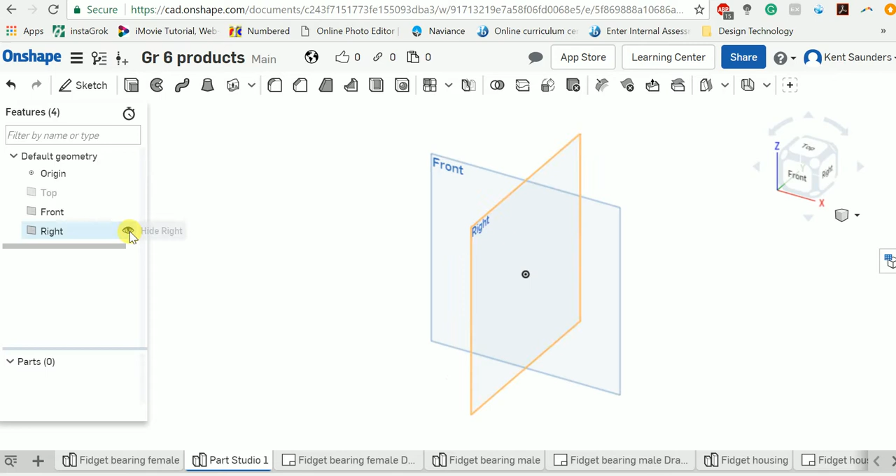So you've got a new Part Studio open. We will get rid of the top and the right plane. We don't need to see those if you saw what I just did, or you already watched the first tutorial. Now on this front plane, we're going to select that again, and we're going to say Sketch, right click, View Normal onto Plane.

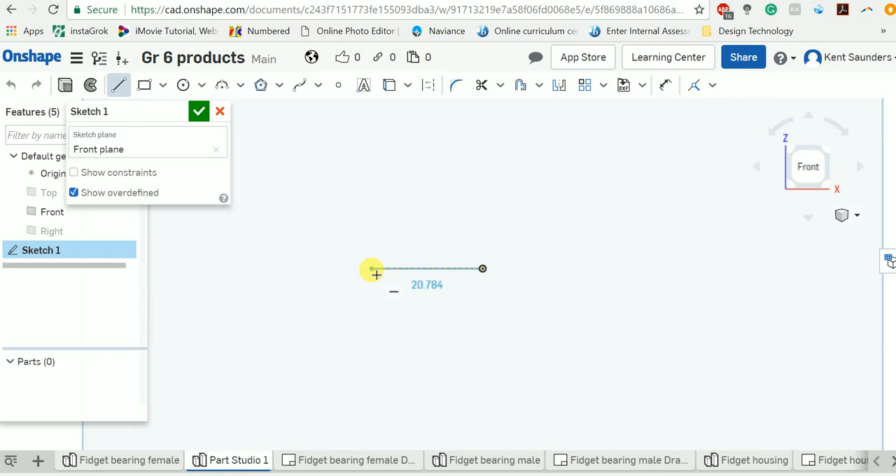Zoom in, because once again this is a small part, and from our center point datum we are going to sketch one line horizontally, and that one is going to be 12. Yep, 12. So like I said, it's rather small.

I'll zoom in again from this line, making sure we're vertical, not at any angle. We are definitely at right angles. We can click and we will make that one 3 mil off in a horizontal plane, and that one is going to be 6

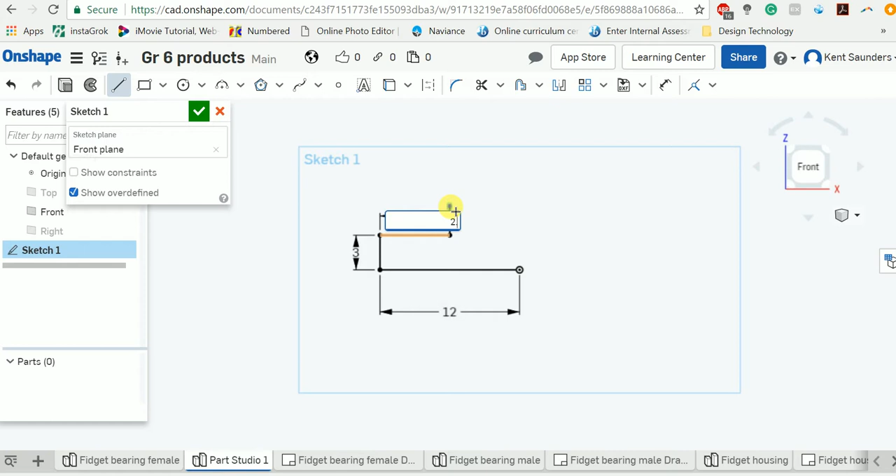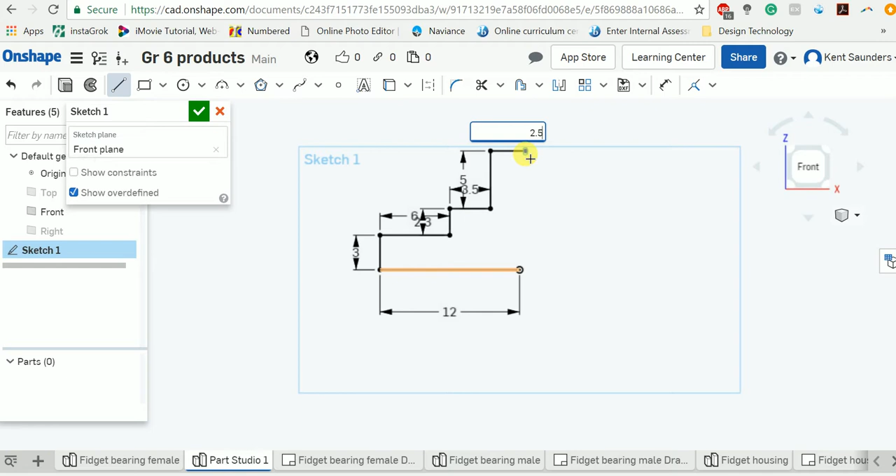vertically. That is going to be 2.3 horizontally at 3.5, vertically at 5, horizontally at 2.5, enter. Now that should be at right angles and join back up with our datum point that we started on,

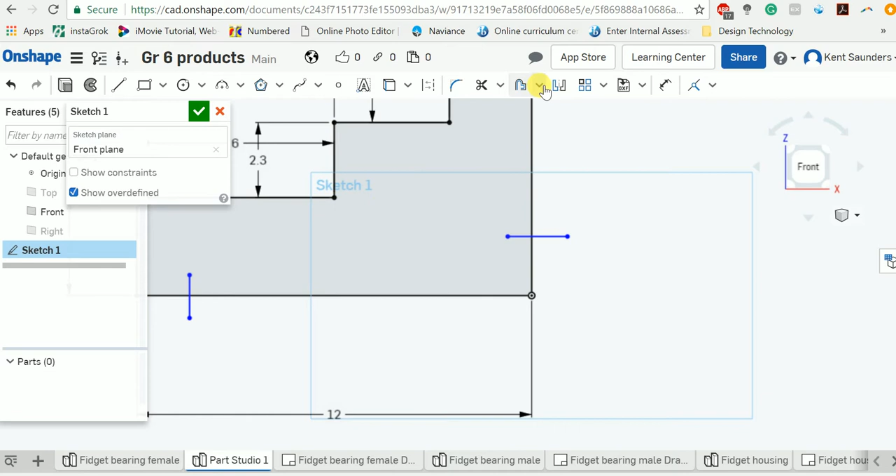10.3 as it happens. Now we're going to scroll in with our sketch still open, our sketch line still. We're going to make a line somewhere up there, escape, sketch line somewhere over here, escape, and our dimension tool from this point to our line is going to be 2 mil, and from this point to our line is going to be again 8.5.

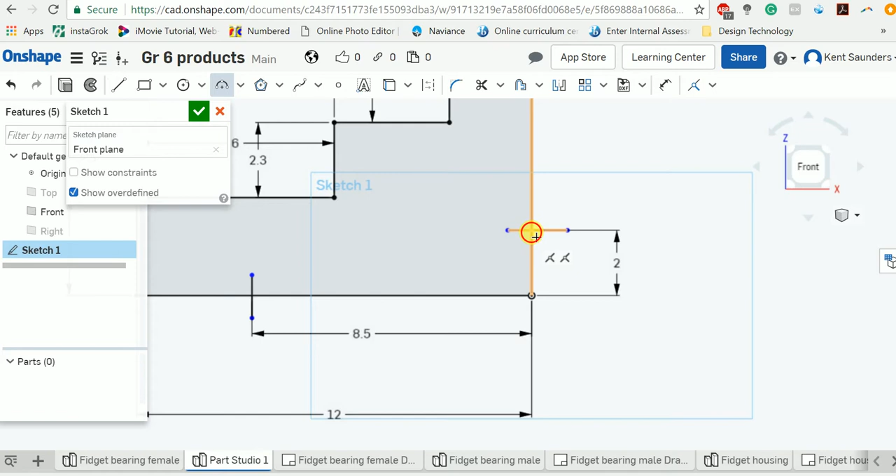With the 3-point arc selected, we will start as that line highlights and the intersecting line highlights. We click, then we come over to this line that runs horizontal, and the intersecting line highlights at the same time. Click again, raise that up, the arc will run this way. We'll click and make that 20.

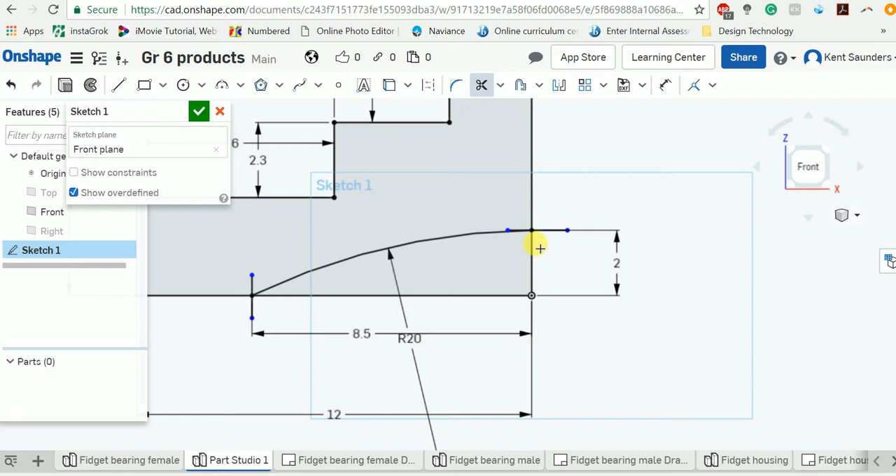Now with that said, we have to remove a few lines, so our trim tool will remove this one, and I'm going to zoom in to make sure I remove the right line there and that one as well, and zoom back in and remove both sections of that line.

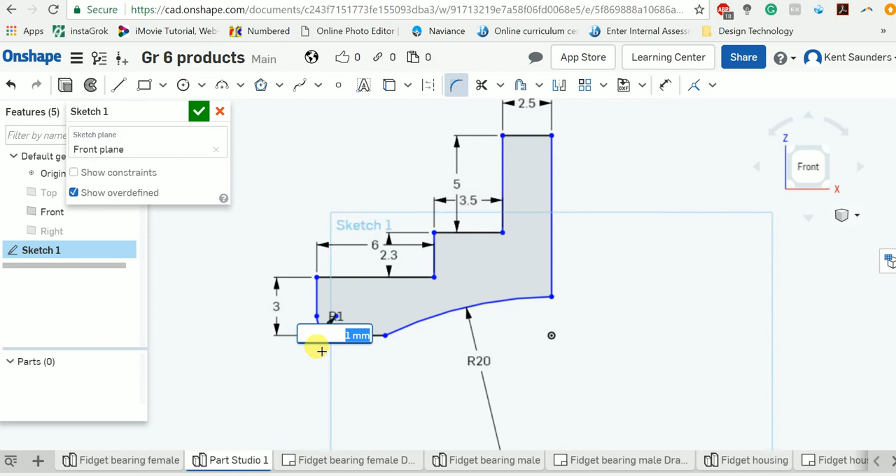Almost done. A little filleting to happen. Now we will fillet this and this point, a radius of 1, enter. We will fillet this and this point at a radius of 1, enter. We will also fillet this and this point, but not at 1, we're only going to make that one 0.5, enter.

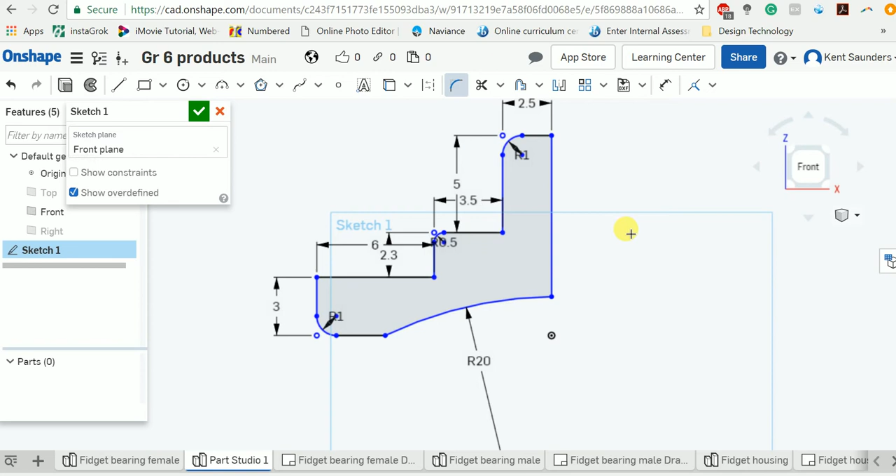Now there we've completed our sketch as it needs to be. We say yes, we're happy with that.

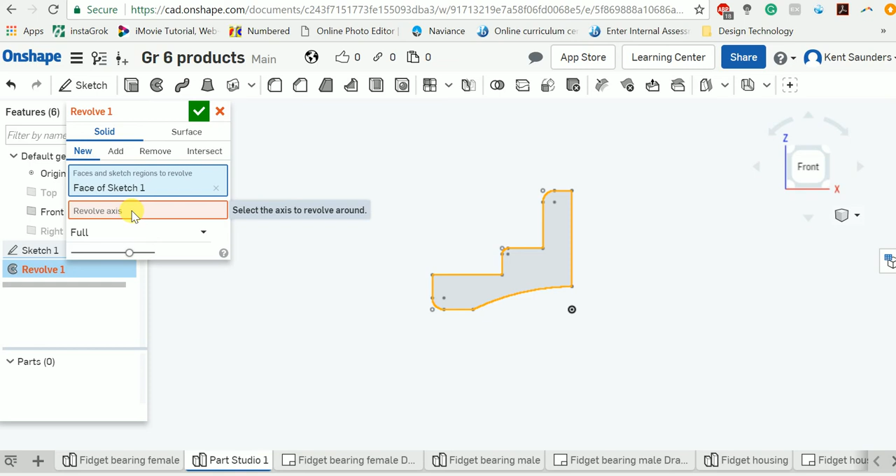And the last thing again is on the little donut revolve command. We click on that, and we can click and drag a box around all of our sketch. Click into the revolve axis, and that's the axis line we will revolve around. And yes, we're happy with that, and we now have our Fidget Bearing Male.